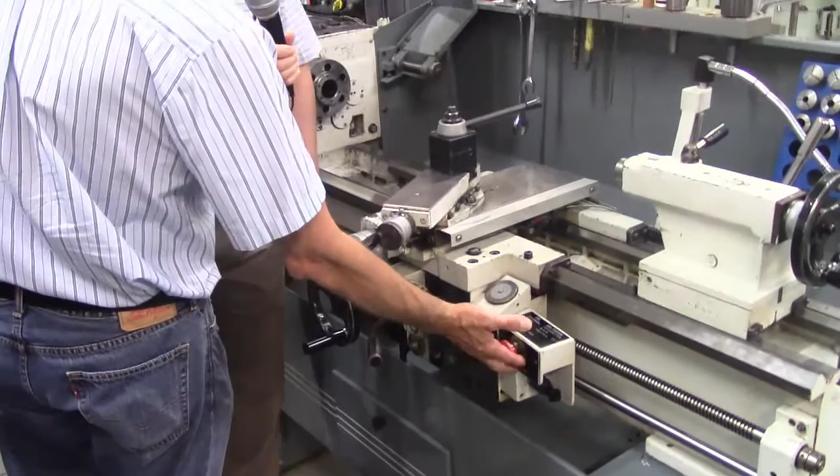And Don, as we've always talked, one of the things the student should always know where something is, and that's the emergency stop. So before we do anything else with this, where is the emergency stop? Typically, you will look for a large red dial type of button. It may be encapsulated around a yellow, so that way you can easily identify it. On this particular machine, the E-stop is right here on the control front of your machine. All right, and it's just a matter of depressing it, and it shuts the power off to the machine.

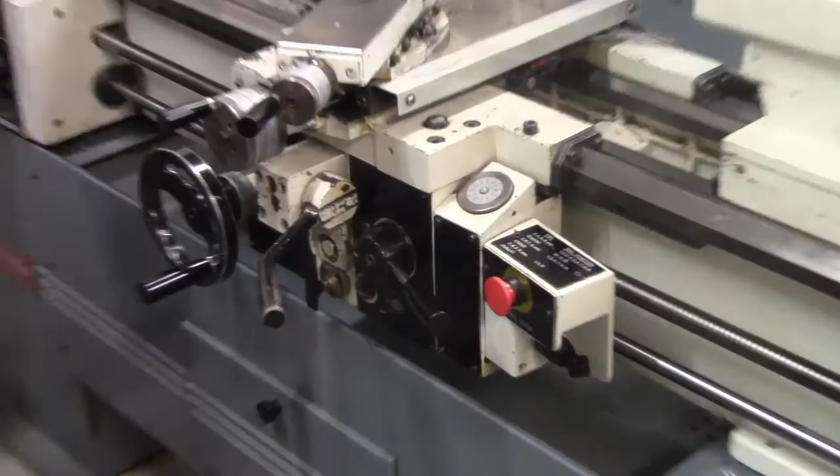Okay, so Jason, why don't you get just a close-up where that is on that machine? And that's the E-stop. So always know where your E-stop, or emergency stop, is. Know where that is before you get started.

Let's review what Don has just discussed with the safety. First of all, safety glasses need to be worn at all times in the shop. Number two, you should be wearing short sleeves. If by chance you come with long sleeves, you're going to need to roll them up above the elbow. You want to have no jewelry, no necklaces, rings, dangly earrings. No earbuds or headphones. You need to be able to hear what's going on.

Not only that, the earbuds or any wires connected to you or your devices can get caught up into the machine and pull you in. Same thing with your hair. It needs to be tied back if it's of any significant length. And you need to know where your emergency stop is before you operate any machine.

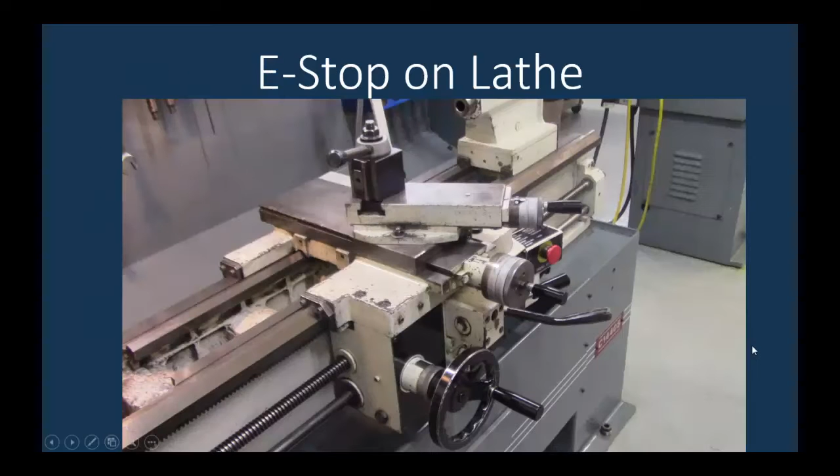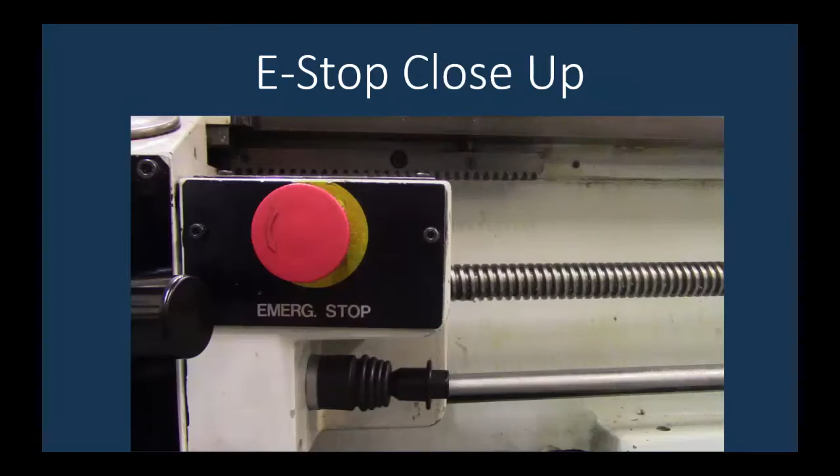Mentioned in the previous slide was that you should always know where your E-stop is on a machine. And here you can see in this slide the arrow is indicating where that's located on the lathe. It's in the front of the machine, and it has that red button. If you see a close-up of it, you see it's a red button. Once you depress that, the machine will not operate. No power will flow to it.

To disengage the emergency stop once you've determined that it's safe to operate again, you can turn that in the direction of the arrow, and then your controls will begin to work again. All right, Jason, let's move around and we're going to do some part identification.

All right, first thing, we're on the back side of the machine here, Don. Where is the main power button and how do you activate it? As you can see, here is your main power box, and right here is your main power switch. All you have to do is rotate this, and now you can see lights energized.

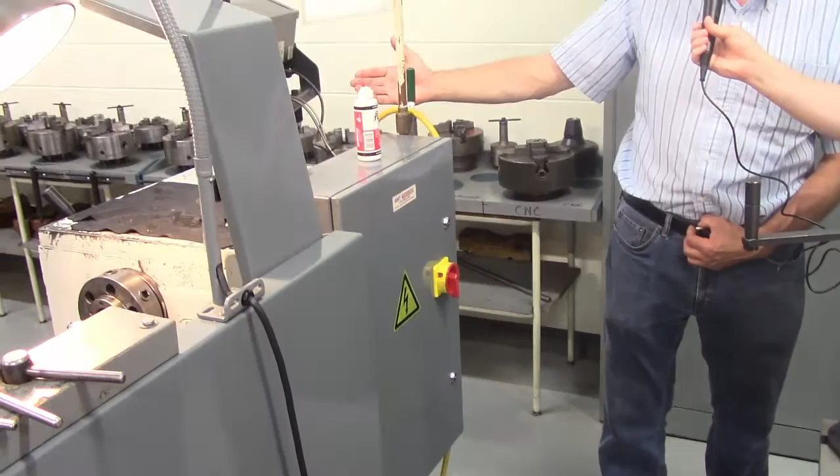You may hear a beeping sound that's telling you that your digital readout, or better known as your DRO, has been activated. So your main power to the machine is right here. So if you ever walk up and you don't have power, check here. And you can also read it. It'll say on, off, or 0 or 1. All right. So it's just turning it about 90 degrees, Don? All right. Let's move on to the front of the machine.

Now, Jason, you may want to... This is the headstock, is it not, Don? This area of the machine is considered the headstock, yes. Okay. We couldn't hear Don, but he did say yes to that. So Don, let's go over some of the things, like first of all, the control panel. Can you tell us what's on the control panel and what we need to know?

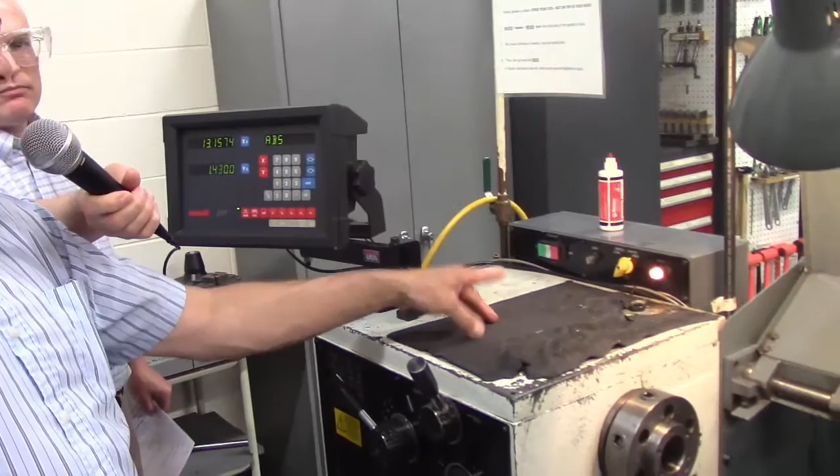As soon as we energize the machine, we can come around to the front side of this machine, and we can see that we have a coolant switch, we have a low indicator light, we have a high-low speed switch, and we have a high indicator light. All right, and this is basically your control panel.

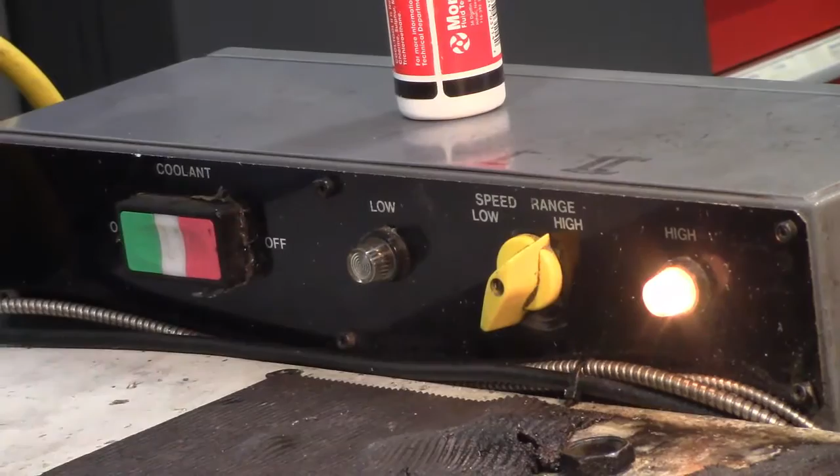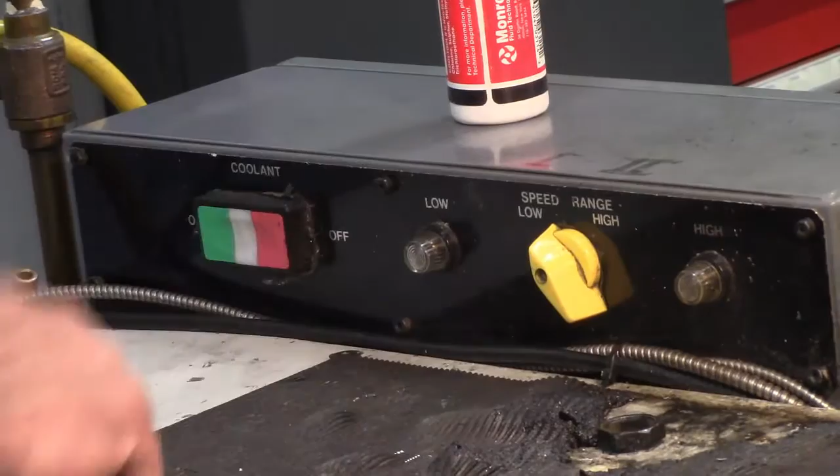You have a 2-speed motor in your machine, so you can pick either high range or low range, and this indicator light is not indicating, but when you're in low range, it's equal to Roman numeral 1, and I'll explain later why, and Roman numeral 2 would be your high range, and you can see the indicator lights turn on. All right. So let's review what we have so far on the left side of the lathe.

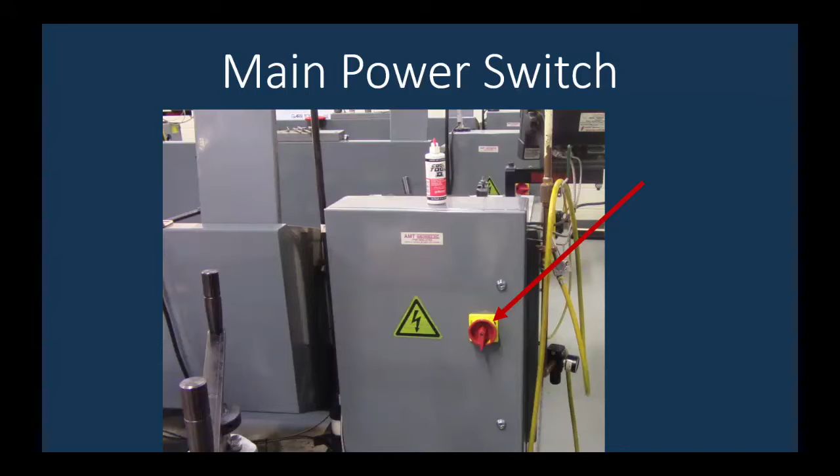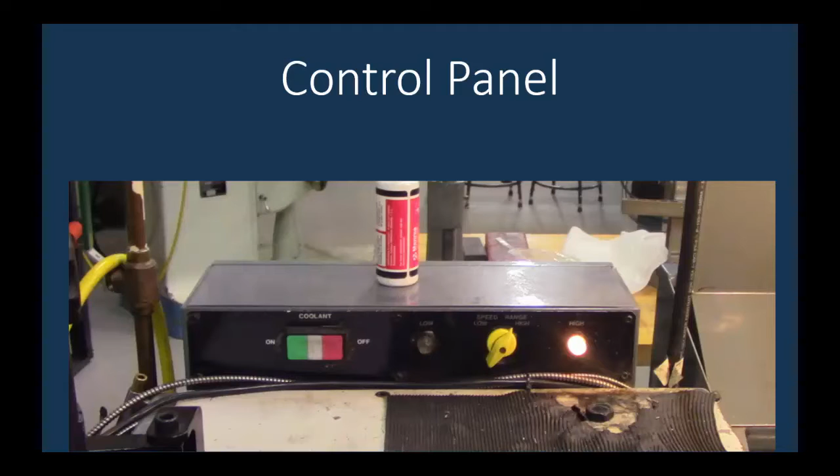The main power switch, you see the red button there. There's an arrow coming in case you can't find it, but that would be turned to the on or 1 position to start it and to the 0 or off position to take the power off. Coming around to the front of the lathe, at the very top left, Don mentioned that there was the control panel, which has 2 controls, coolant on-off. In Engineering 153, you're not going to be using any coolant, so that should always be off.

The other one that you will be using will be the speed range, and that has a low or high. Now, the chart that you're going to have to use on this machine doesn't say low or high. It says Roman numeral 1 or 2. So 1 is low, 2 is high. And although you can't see it on this photograph, the Roman numerals 1 and 2 appear on the top surface of the control panel.

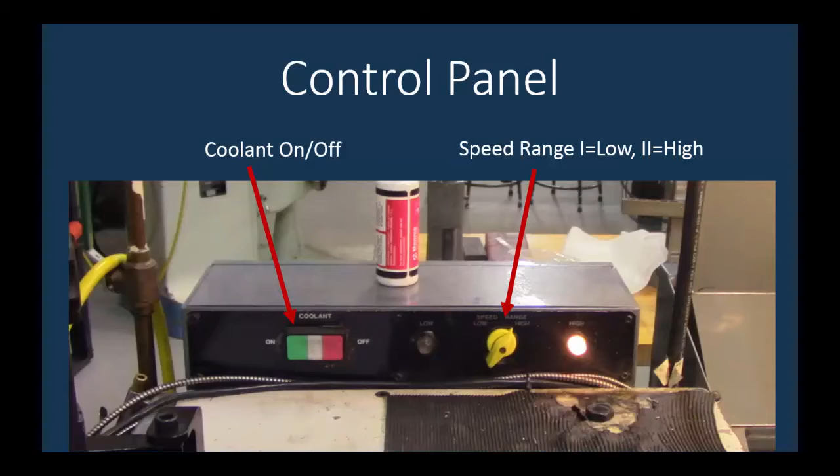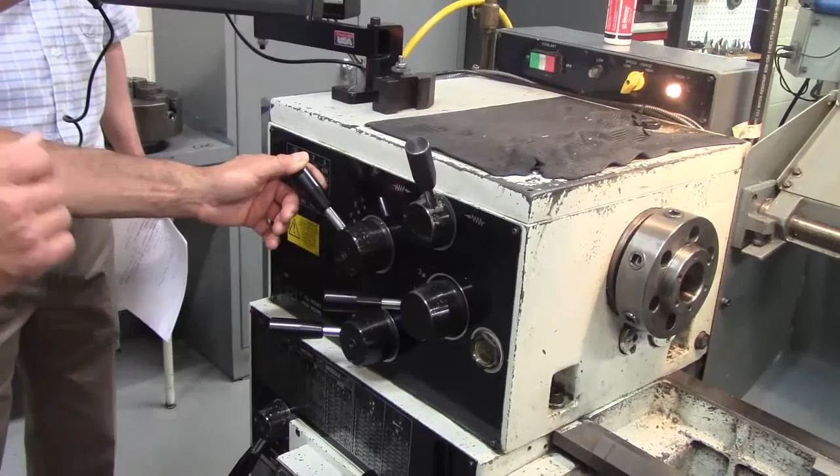On the front of your headstock, this is the whole thing. The headstock encapsulates your spindle and your spindle speeds, and it also has a lever that will help you engage your spindle with your feed rate, and it also has your feed reverse. We'll start at the top. This is your feed reverse handle. It'll actually change the direction of your feeds from forward to reverse.

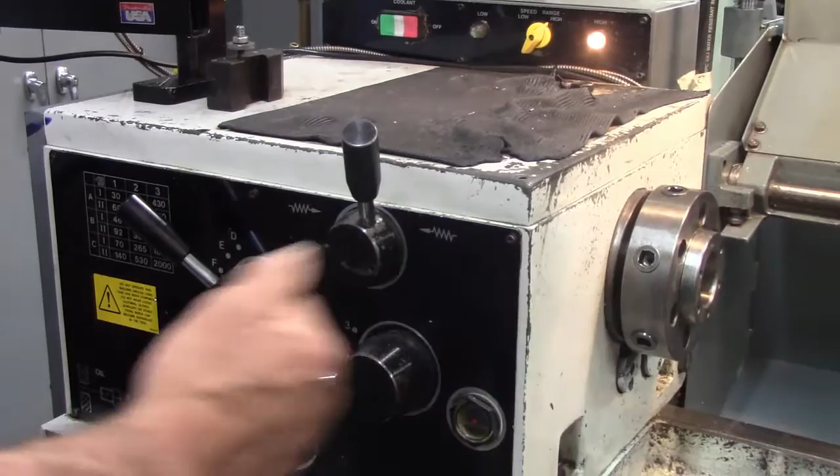Okay, let's hold it right there. So feed is when your tool is coming in or going away. Correct. Okay. And the next two levers that are going to be important are these two levers, which represent your spindle speeds. How do I find out what spindle speeds I need? We would look over here on the chart. I have letters A, B, C, and D.

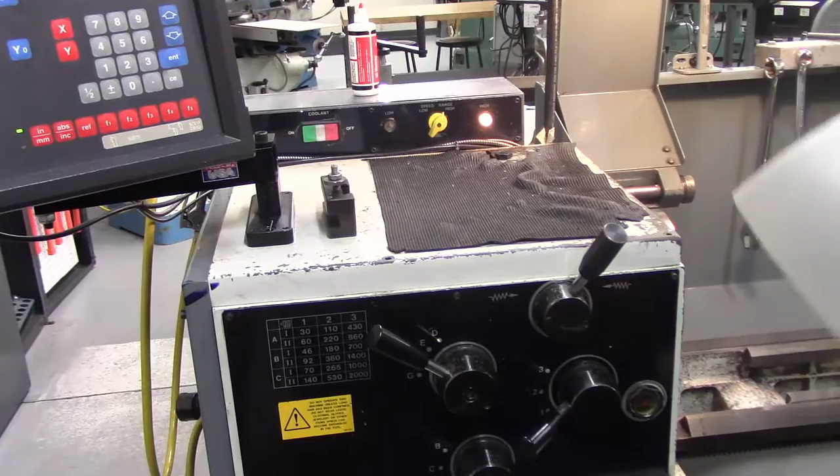Okay, let's stop. So we've just talked about the control panel, which has the coolant, which I don't believe you're going to use in Engineering 153. Are we? You won't.

So we don't have to worry about that. And then it has the high-low indicator speed range, which we'll talk about more in a little bit.

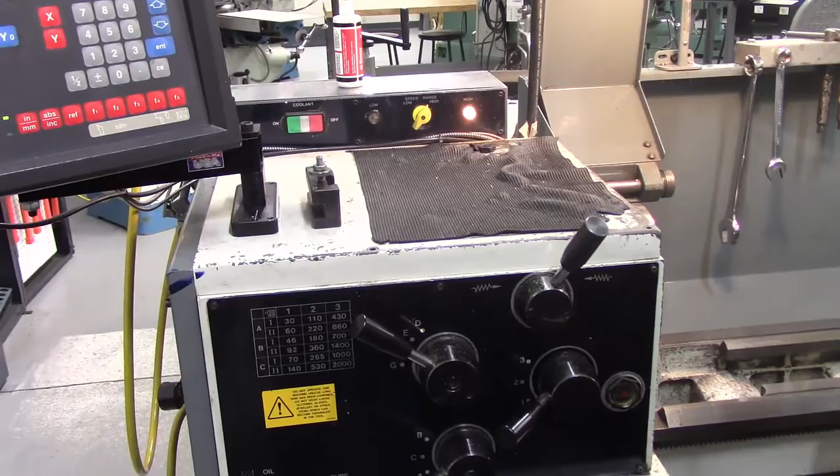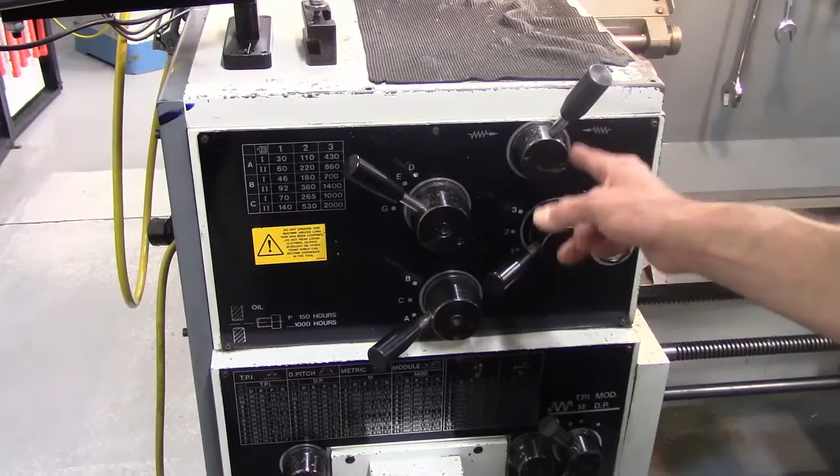All right, Don, moving down to the middle unit here, could you just tell us what are those knobs? Yes, this middle section is still on your headstock, and it helps you control the spindle speed, as well as engage your feed rate and the direction of your feed rate. The first two levers you're going to be concerned with for spindle speed selection are letters A, B, C, and 1 through 3.

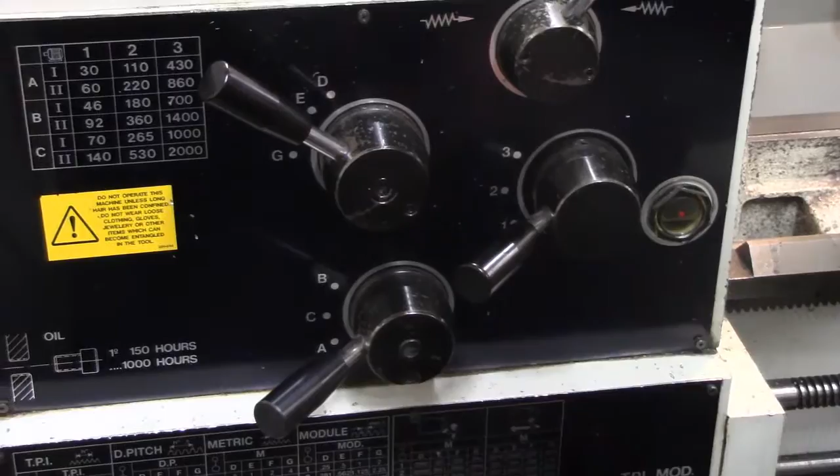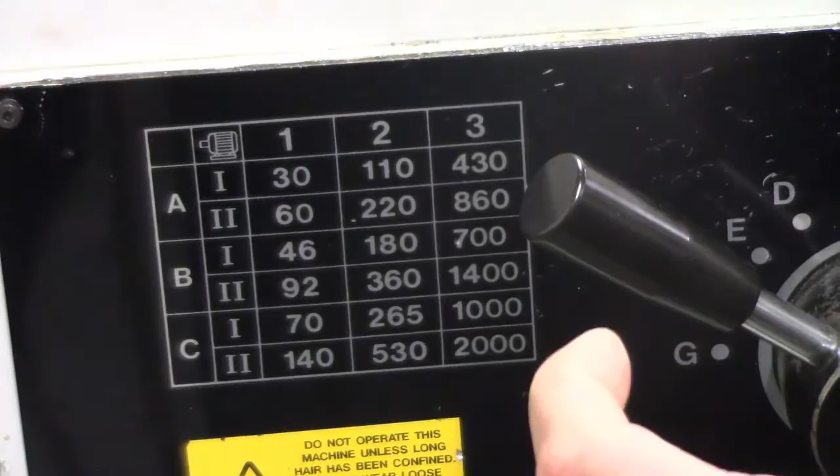And you can see on this chart over in the upper left-hand side that you have a column with the letters and a row with the numbers, and you'll select the designated letters and numbers on your levers. You have Roman numeral 1 and Roman numeral 2 with an icon above it that represents a motor, and that goes back to your high and low speed spindle selection up on your control panel.

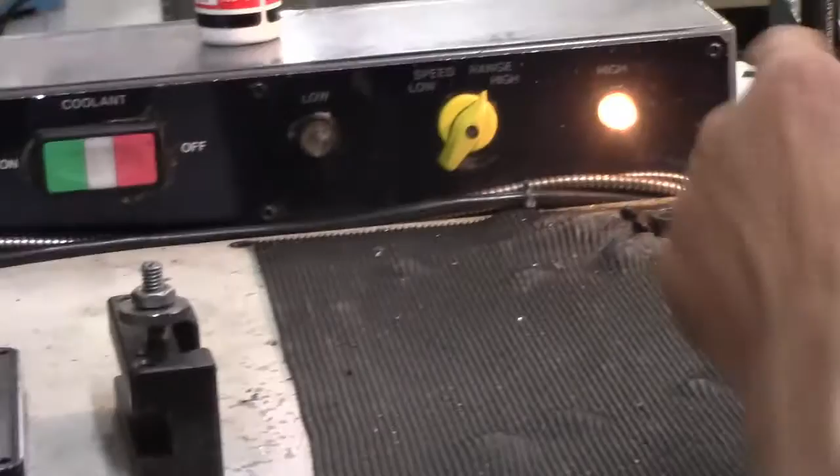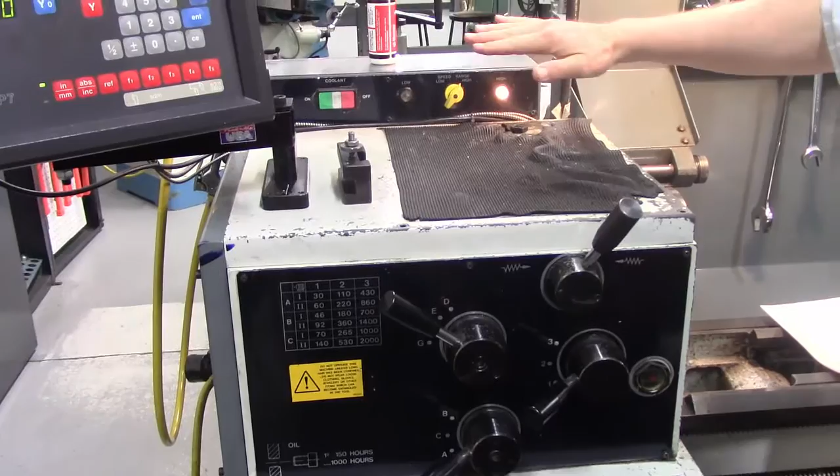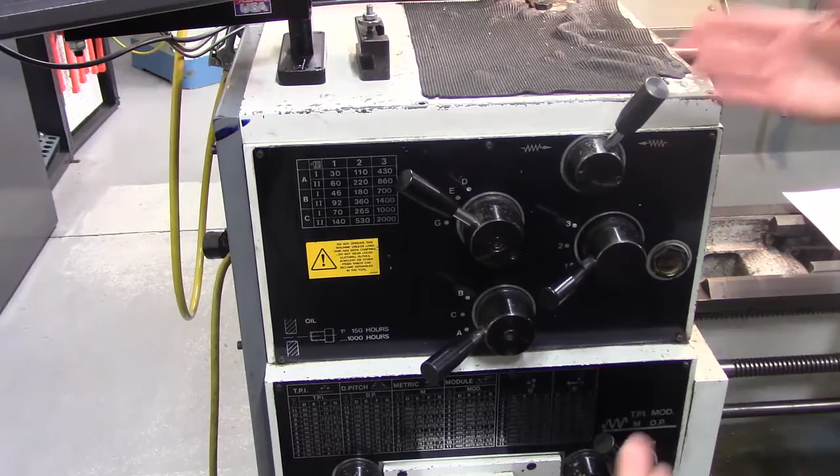So if I understand this correctly, Don, to get the proper speed, I need to do the speed range, Roman numeral 1 or 2, and then the ABC? Yep. And the 1, 2, 3. 1, 2, 3. So the combination of all that will bring us to what's on the chart. Yes, whatever desired spindle speed you would like.

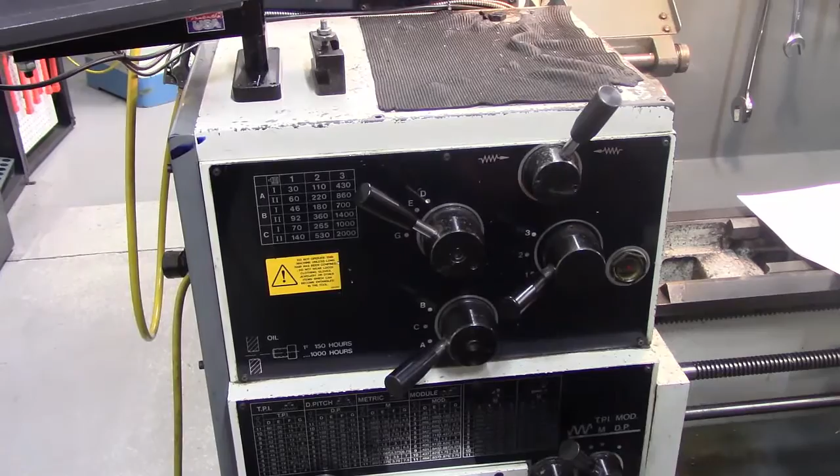All right, Don, so I see these two, but there's two more knobs there. What are those? This one here gets the ratio between your spindle speed and your feed rate set up. So that way, when we set up your gearbox, it knows that if I'm turning 5 thousandths per rev, that means how far the tool will advance in one revolution of the spindle. So this lever here, D through G, will help set up that feed rate.

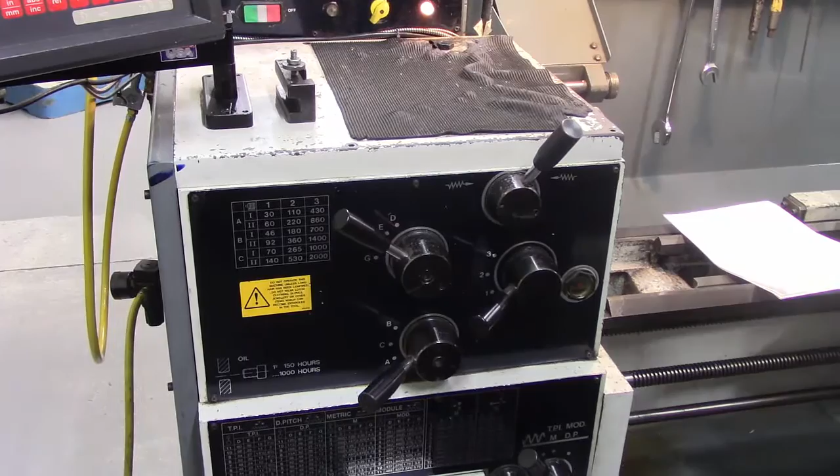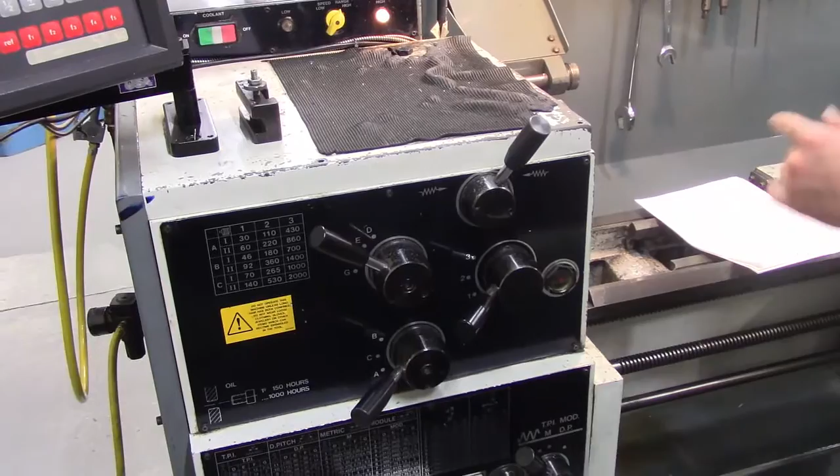Okay. So right now we have two speeds we've been talking about. A spindle speed, which is how fast the material is going to spin. Correct. And that's with these two, and on the speed range. And then the other part is how fast the tooling is going to move into the part. Correct. And that's where this D through G is used. Correct.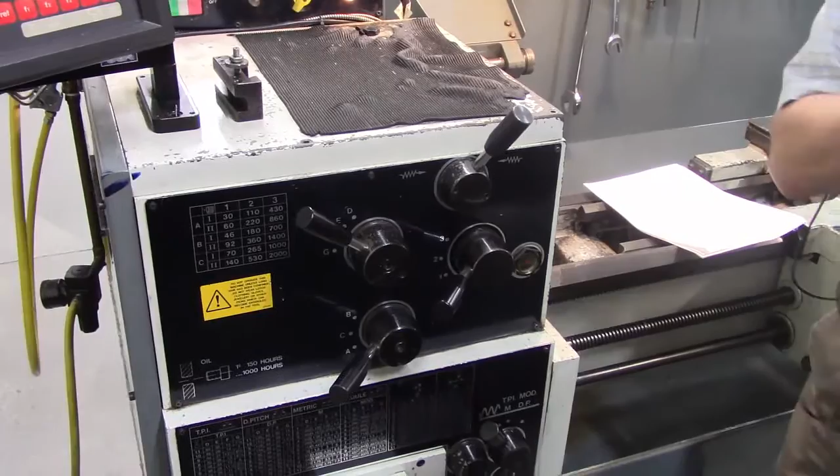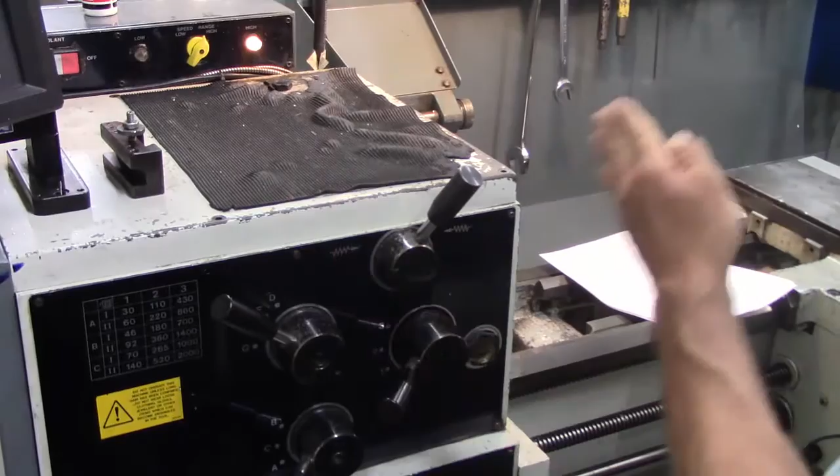Okay, so I have one more button. What's that? All right, this lever selects your feed direction. As you can see by the two icons on the left and right side, you have arrows pointing. So if I've selected this, the carriage is going to move this way. In other words, your tool will move towards the spindle. If I chose this one, the tool will move away from the spindle.

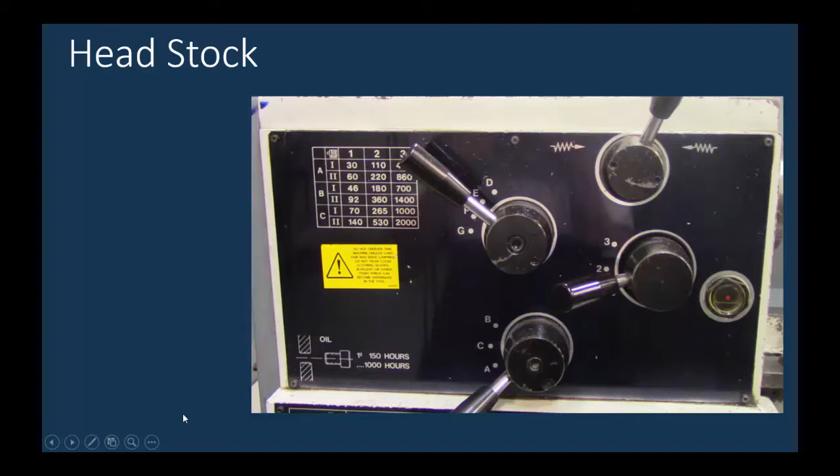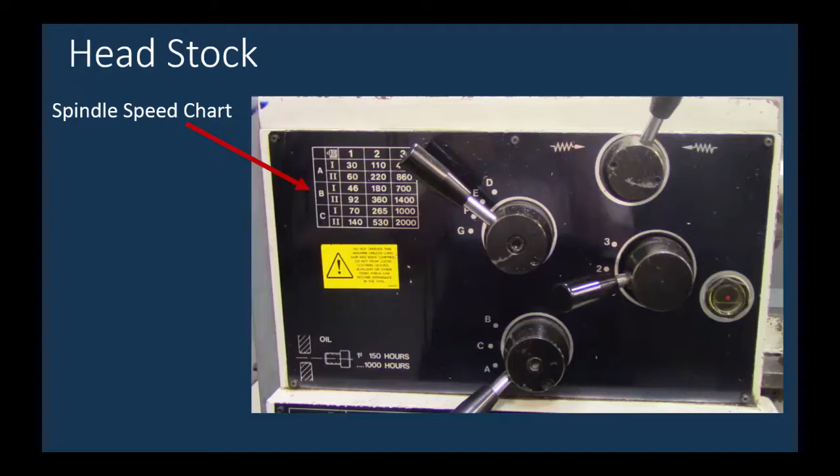So you can actually choose which direction your tool is going to travel. All right, very good. So we kind of got the idea there. Let's review the headstock and the knobs for setting the proper speed of the spindle. The headstock was below the control panel, in the middle. And the first thing on the top left is the spindle speed chart. So with the combinations of the knobs A, B, C, and the 1, 2, 3, and also the Roman numeral 1 and 2, you can set your speed to various things.

Okay. The D, E, F, G lever is for the feed rate. That's the motion of the tool. And we're going to get into that a little bit more when we get down into the gearbox. So that has to do with what's known as the feed rate. The top right lever is the feed direction lever, and right now when it's pulled to the right, that means the tool is going to move from right to left, or toward the left.

Now these bottom two levers, the A, B, C, and 1, 2, 3, correspond to the spindle speed chart. The other thing that you don't see here for the spindle speed chart are the Roman numerals 1 and 2, and those are found on the control panel up above. So that right there is the headstock. Two of the levers have to do with feed rate, two of the levers have to do with spindle speed, and the chart shown here is the spindle speed chart.

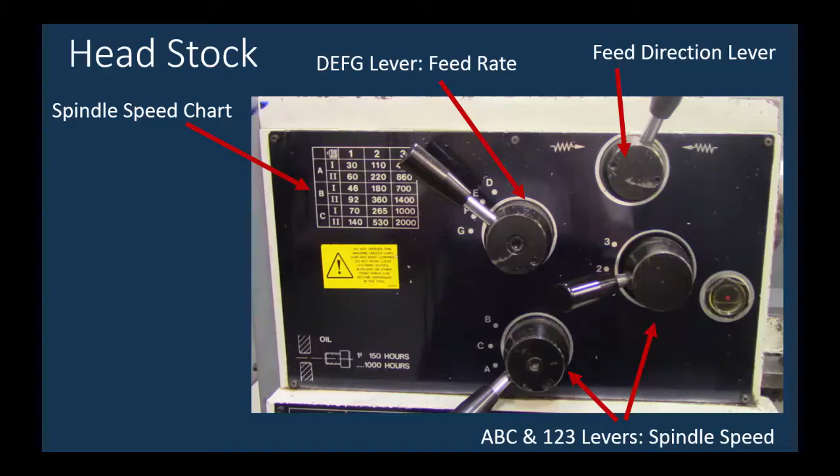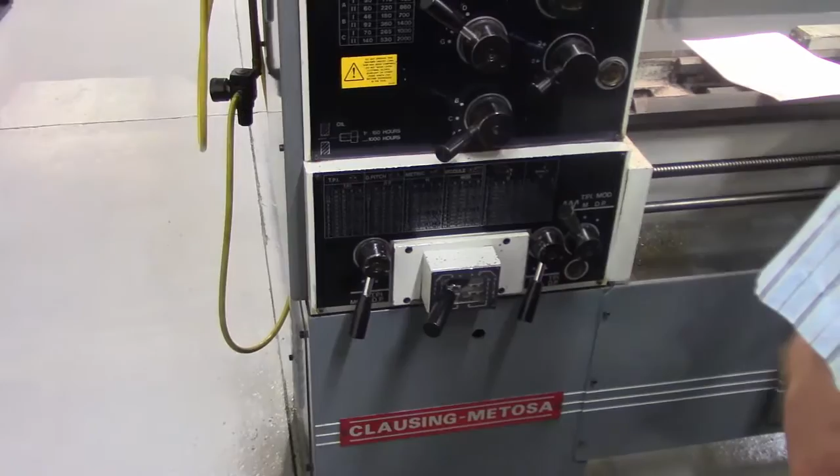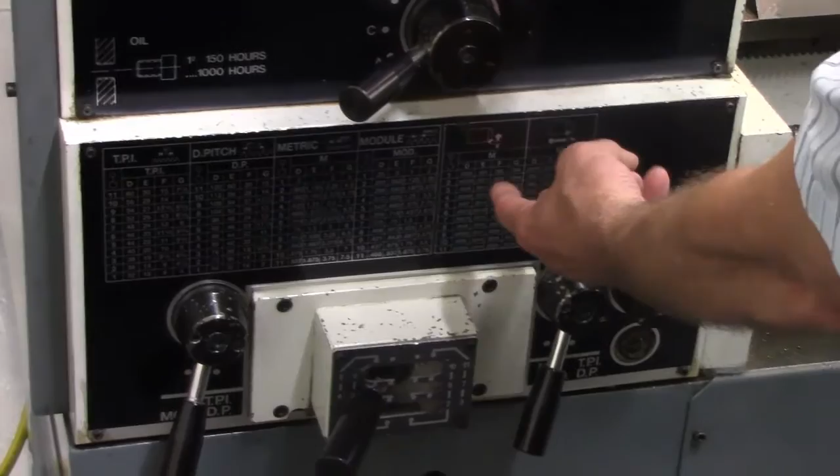Now there's another control unit down here with even more levers. I'm getting confused, Don, so hopefully you can help me out here. All right. Just below the headstock you have your gearbox, and in the gearbox you can see we have a number of different charts here that you may have to get involved with. For our engineering students, you're going to stay mainly focused on here, and this is your feed per revolution charts.

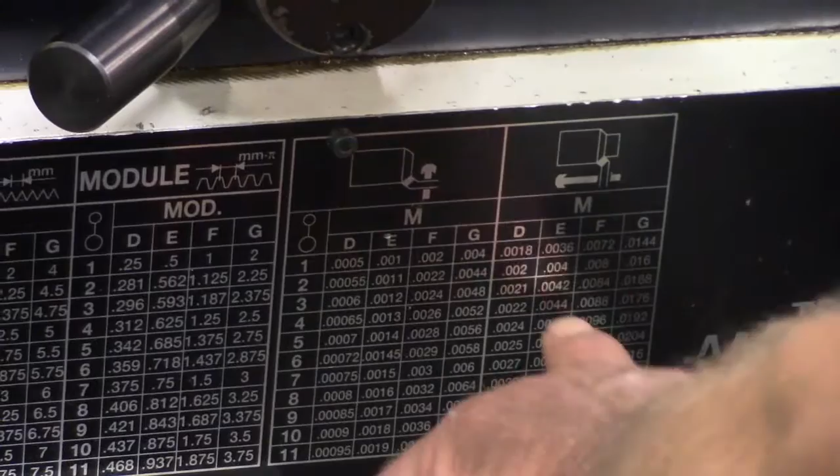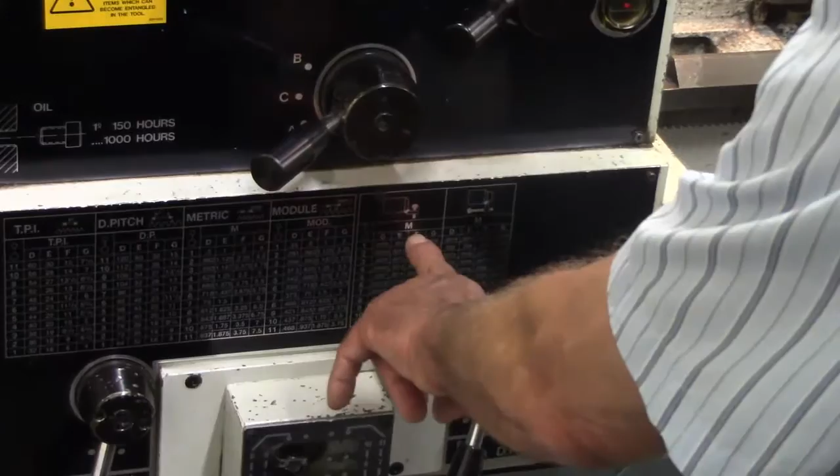You can see by the icons on the right hand side, you have one with an arrow pointing towards the spindle, going towards the left. That's a feed rate designation for your longitudinal feed. In other words, my tool is moving from tailstock to headstock. You pick any one of these numbers, you look it up on the chart, it tells you what lever has to be set where so you can get a longitudinal feed. The other chart that you'll be concerned with is your cross feed, and you can see that with the arrow in the tool bit.

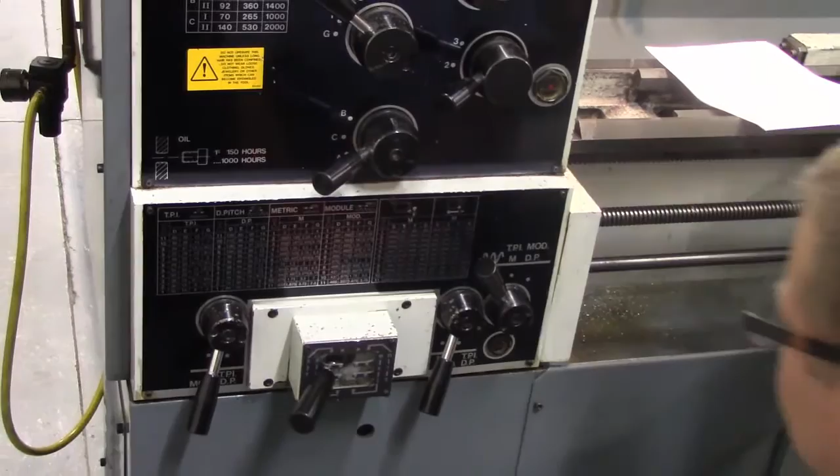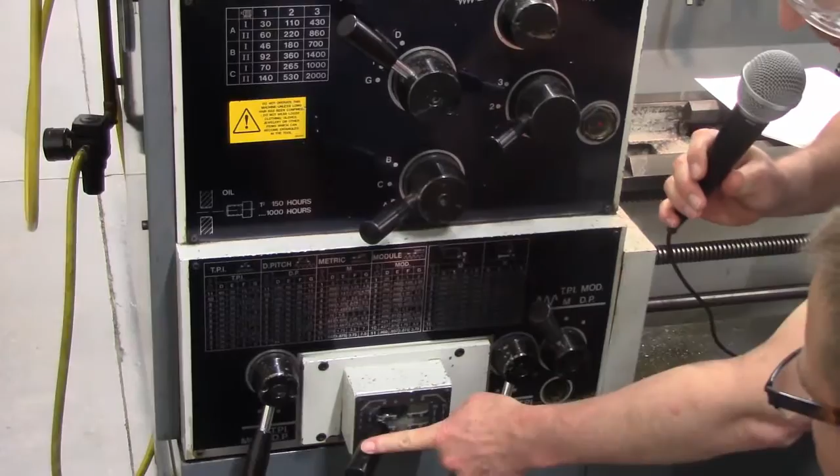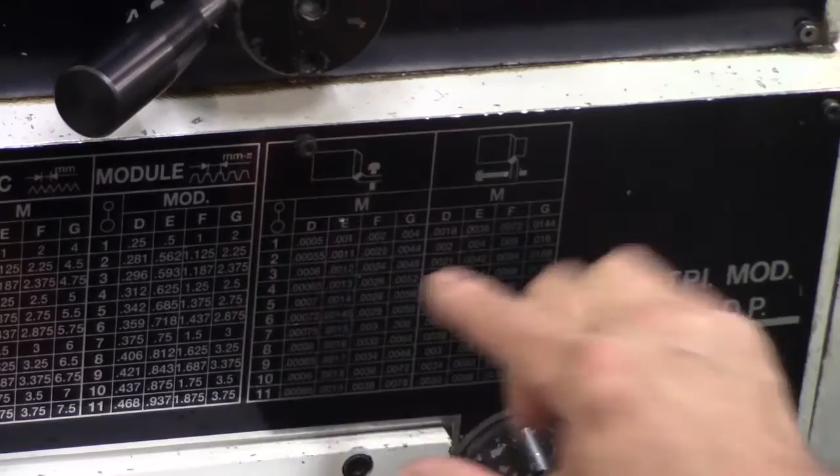All right, so this feed rate thing, Don, first of all, we go back up to this center console. You have to choose a letter there. And then there's 1, 2, 3, and then 4. We need to have those all concerned too? Yes, you do. And when you look at this chart, you'll see that you have an area here. You see this lever here. This lever means I need levers set up in M. Then I have a row across here. We have the D, E, F, and G. Now we go back up and we can look at here.

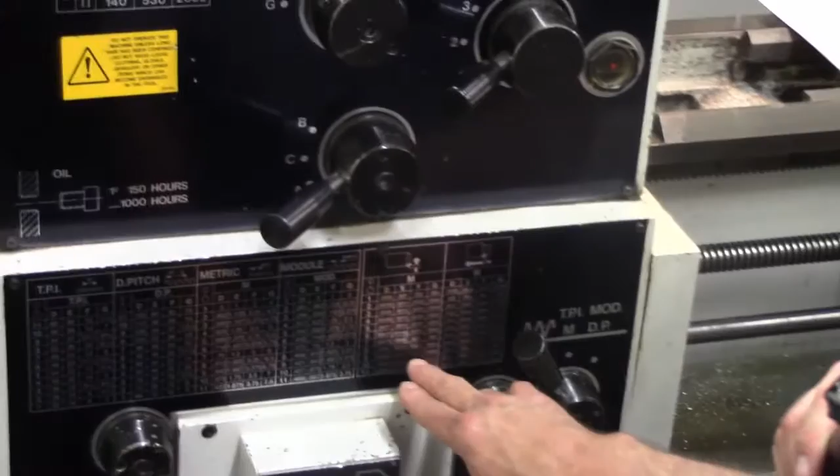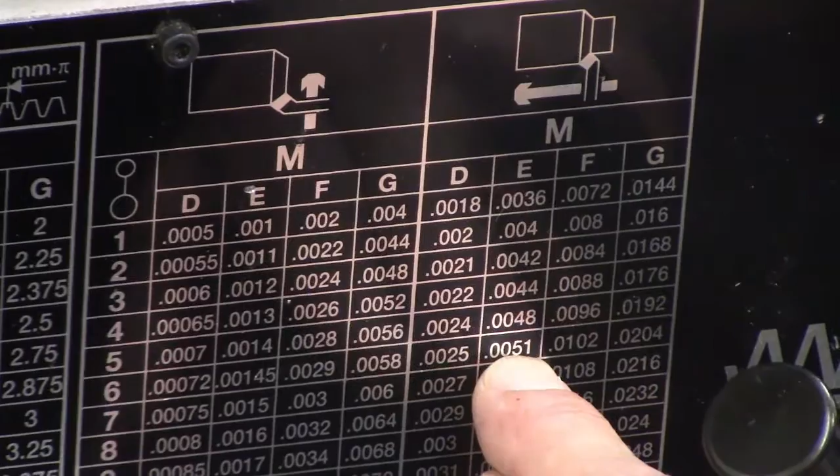So if I wanted to do 5 thousandths per revolution, which is 0.005, I'll use that for an example. The closest one we have is 0.0051, which is ME, and we slide across here to 5. So we have to get all the levers set up properly. We look up here, and we're already set in E, right? The 2 levers for M are here. These 2 levers need to be set in M. We need to be set in 5.

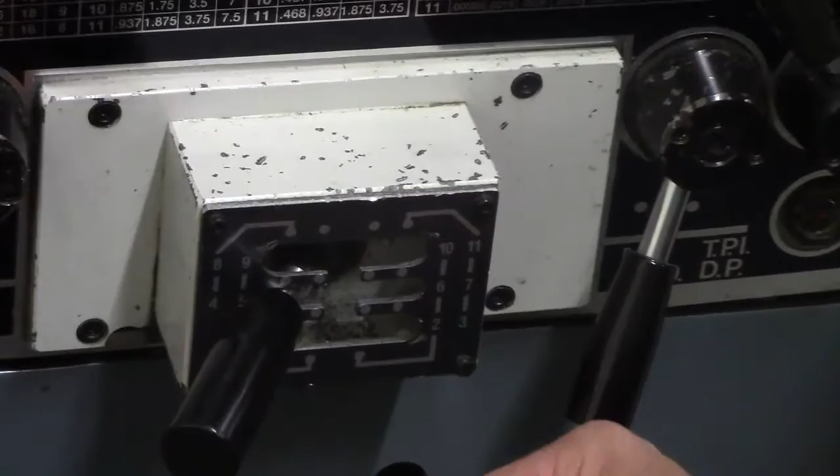You have this H pattern, all right? I used to look at it as the old international symbol. Some of you may not be. I'm dating myself a little bit.

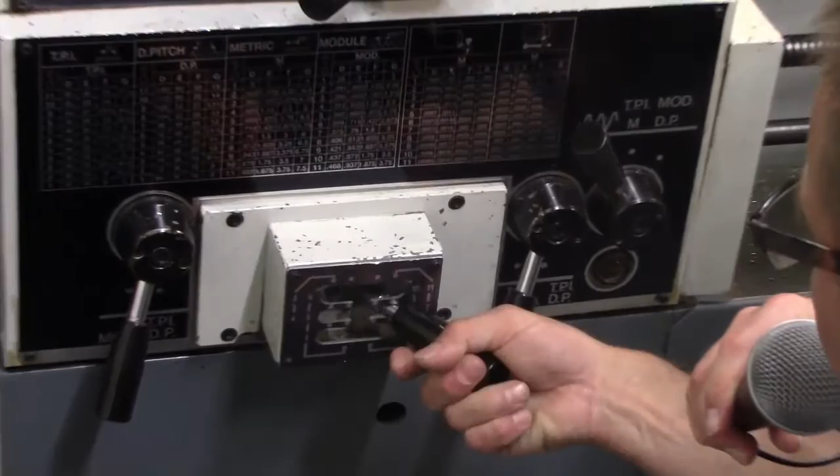And we look at here, and you got to pay attention to how these numbers are numbered. You got 2 sets of numbers right here on the right-hand side. We have 10, 6, and 2, and we have 11, 7, and 3. Well, 11, 7, and 3 is the farthest column to your right. The 10, 6, and 2 is close to the center where you can move the shift lever up and down. So the 6 is actually in the second column, starting from right to left. And then the 7 is you move it over more? If I wanted the 7, I'd have to shift it over to the complete right-hand side. So there's little dots there that are telling you that there are different transmission locations.

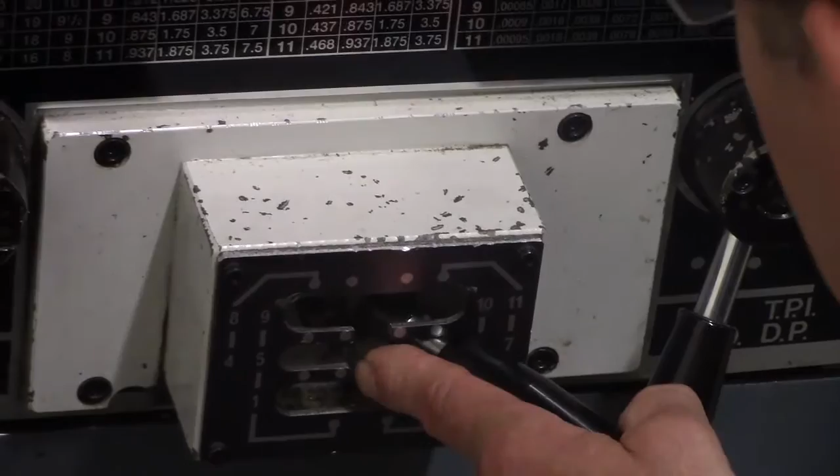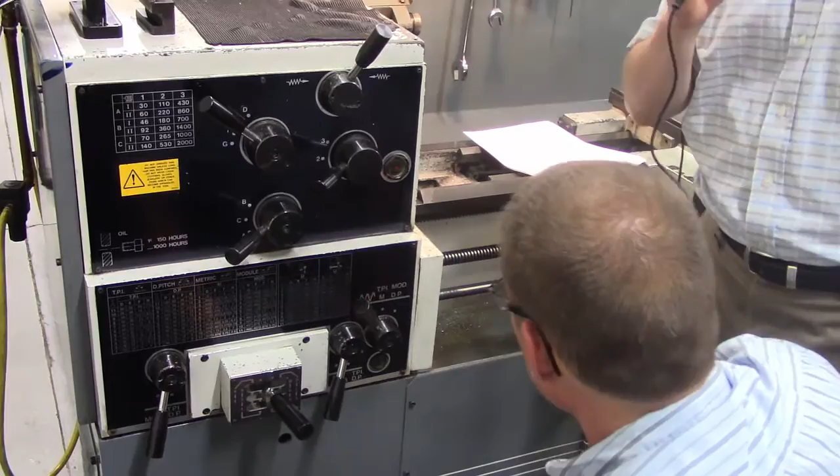Now, Don, I don't know if Jason, you can see what Don's doing here. He's turning the, what do you call it, the chuck? The spindle. And why are you doing that, Don? Because I can't get the gears to mesh. So there's a little bit of play that you have to be messing with to get these things to mesh properly. And there, I think Don just got it. Later on we're going to give you an example when we actually do a part cut as to how to set these all up again, and we're going to review them again. But thanks, Don, for that area.

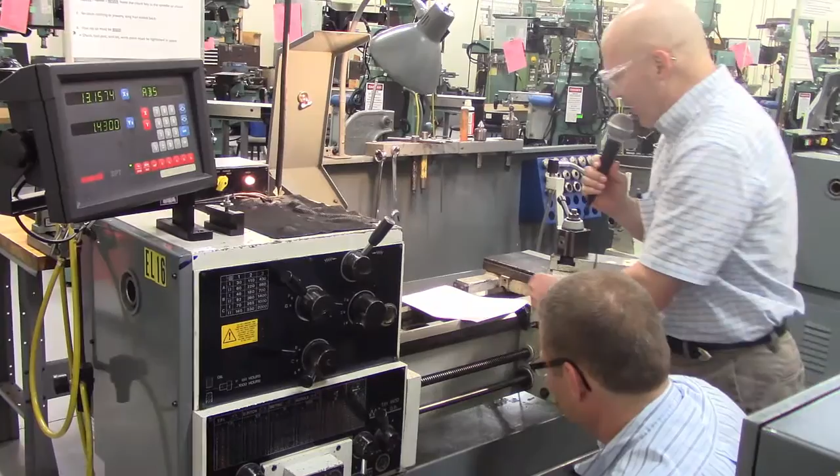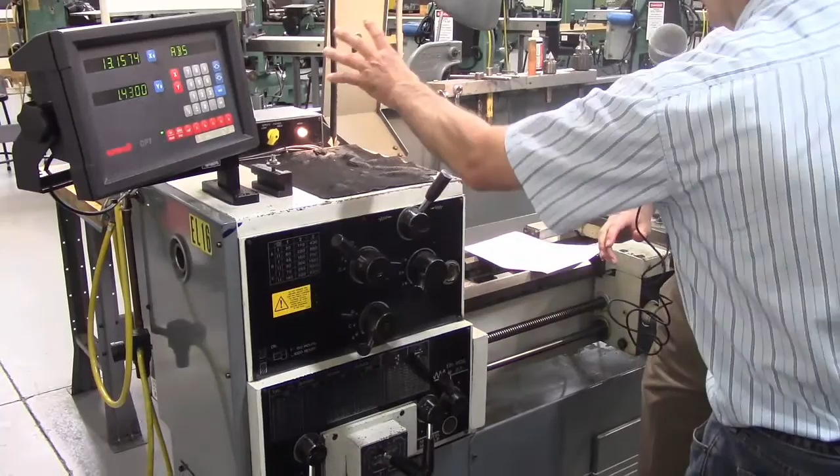So that's the gearbox. So this whole area over in this section is called what, Don? This is the headstock and the gearbox. You have a control panel, so it's just the left-hand side of your machine. Okay. So headstock, gearbox, and control panel. So 3 things over on that side.

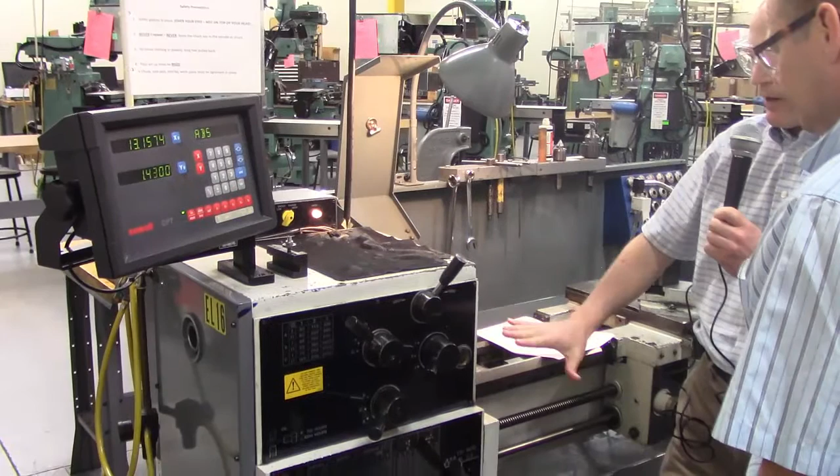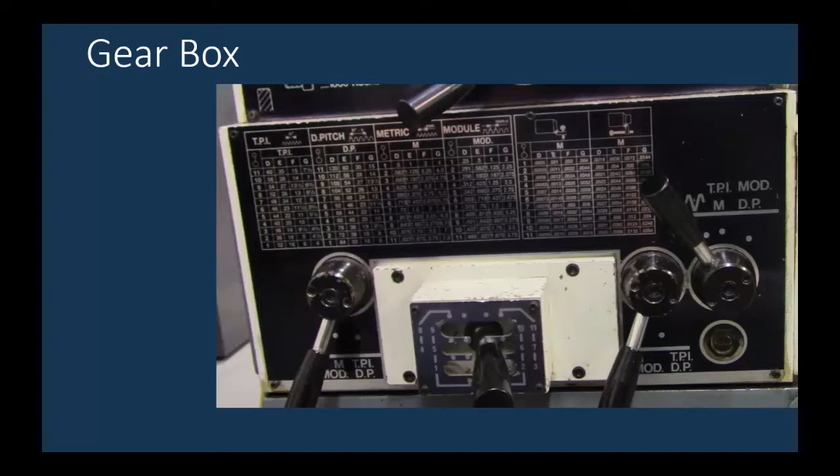Let's review the gearbox that Don just went over. It was a little confusing to me, so let me take it at my pace and maybe this will help you. So let's start. First you have the feed rate chart. Now most of the things on this chart are not going to be relevant to Engineering 153 students. So all the tables starting from the left, the TPI, the D-pitch, the metric, the module, those all have to do with special ways of cutting threads on rods and so forth. So we're not going to use any of that. We're just going to use the 2 tables out to the right.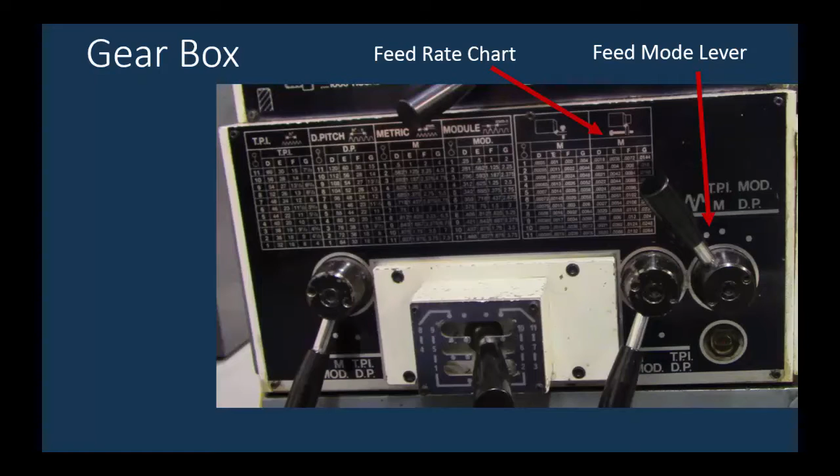In fact, probably the main one you're going to use is the far right one, which is going to be the longitudinal feed rate chart. So with that longitudinal feed rate, you have several knobs you have to put into the correct positions. All right, the feed mode lever. Don didn't mention this, but I believe, and we're going to get into this later, that this leftmost position is where you're going to be using it. I think that's for the standard feed. The TPI and the MOD, DP, those all have to do with cutting threads, and we're not going to use those. So working around here, when you have to put it in lever M position, there's actually two levers that have to go into the M position, and I've shown those with arrows.

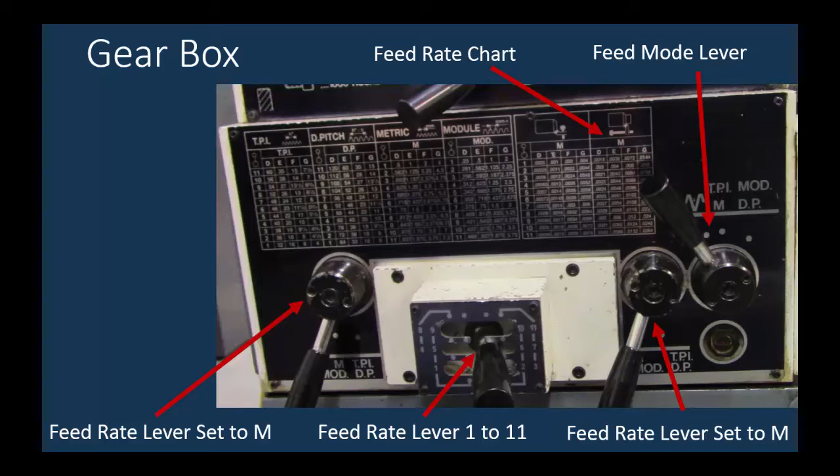The last lever on this lower gearbox is the feed rate lever 1 through 11. Okay, so with the 1 through 11 lever and the M lever, you can get pretty close to what you need. But don't forget, as Don said, there's still the D, E, F, G lever that's up on the headstock that would have to be set. So all the levers needed for feed rate are not shown. There is the D, E, F, G lever that's up there on the headstock. But these are the four levers that you need to work with down here. And remember what Don said, sometimes to get into the gear, you've got to rotate the spindle a little bit to engage the gears.

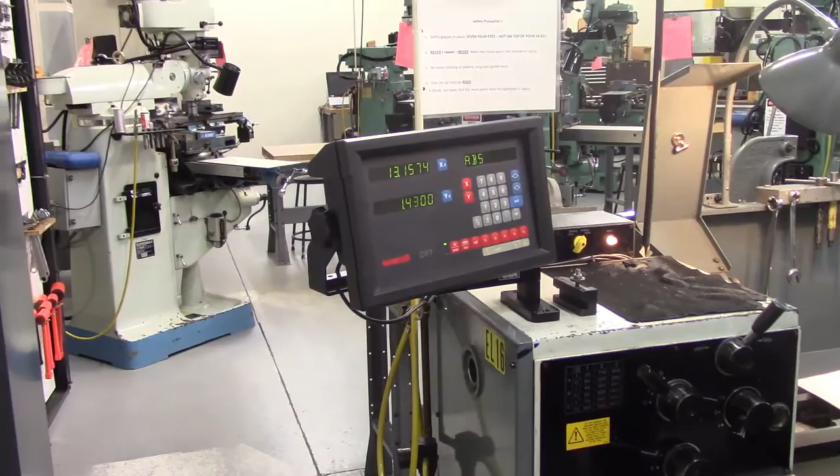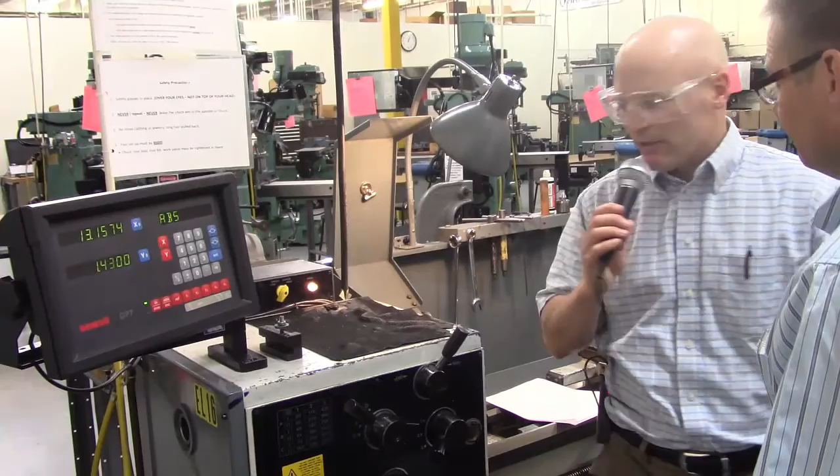I know we're going to get to this later, Don, but you know, this thing with numbers on it, what's that? That's your digital readout. We refer to it as a DRO. Okay, that's the DRO, and that helps us keep track of what? Our tool position in relationship to our part. Okay, so we'll get into how that all works in just a bit.

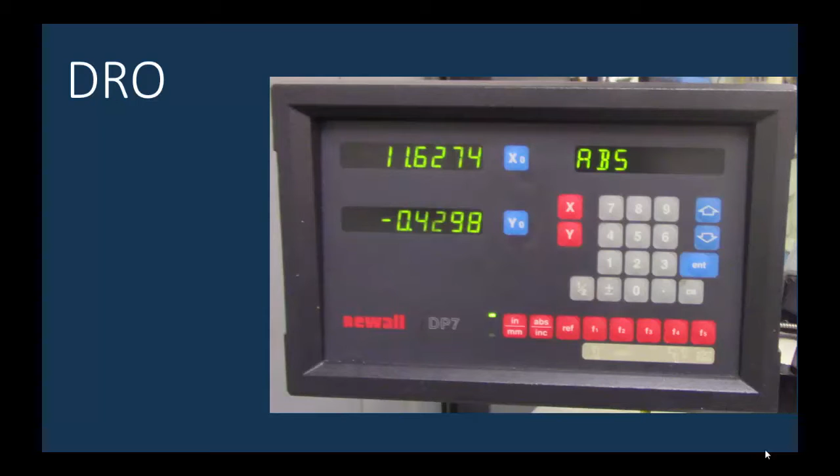Here's the DRO, or digital readout, that Don quickly went over. It has an X and a Y. So the X is used to track the position of the tool relative to the part as it moves parallel to the axis of the spindle. So this would be known as the longitudinal feed, or the left and right motion of the tool. The lower numbers here are the Y, and that's going to track motion perpendicular to the axis of the spindle. This is you kind of moving in toward or away from you and back towards you. This is known as the cross feed. And we'll get into how to use this device later on. But just remember, we've got X and Y, longitudinal or cross feeds.

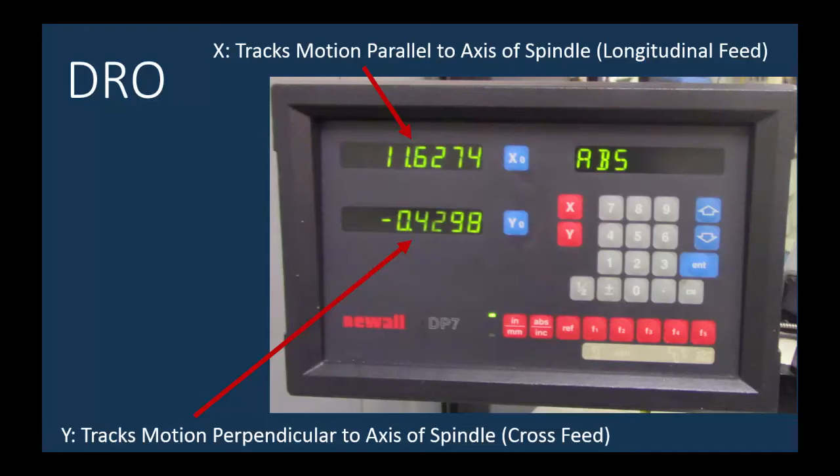We're now ready to look at the questions to make sure that you have a general understanding of what went on in this left side lathe video. The first question is, list all the safety procedures that were reviewed in this video. So make a list. Number 2, make a diagram of the control panel and label the controls on it. Number 3, do the same thing and make a diagram of the headstock and label all the controls and the chart that's on there. What does that chart represent? And then 4, do the same for the gearbox, label all the controls and the chart, and mainly the chart that we are going to use in Engineering 153.

And finally, describe what type of motion is monitored by the X and Y readouts of the digital readout, or DRO. So what way is the tool moving relative to the part when it's moving in the X direction? And then do the same thing for the Y direction. Remember, hand these questions in to your lab instructor and make them very happy.